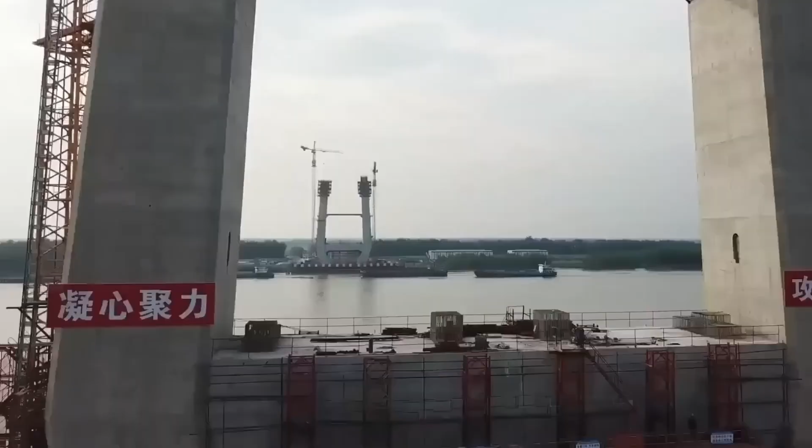China, hailed as the infrastructure maniac. Former US President Trump once openly declared that America would never be able to compete with China.

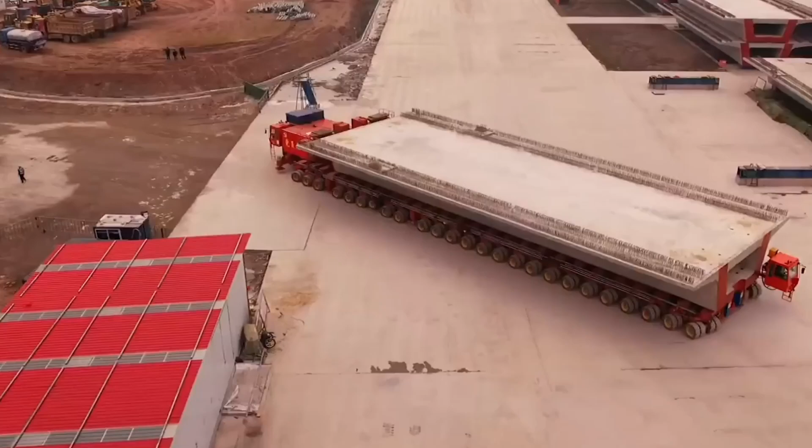I love China. People say, "Oh, you don't like China." No, I love them. But their leaders are much smarter than our leaders, and we can't sustain ourselves. China, you go there now, roads, bridges, schools, you've never seen anything like it. They have bridges that make the George Washington Bridge look like small potatoes, and they are all over the place.

Does reality truly align with the president's description? The truth emerges as we dive deeper. What you're witnessing is China's monumental cross-sea megastructure, the Shenzhen-Zhongshan Link, an engineering colossus spanning turbulent waters. It serves as a core transportation hub project in the Guangdong-HK-Macau Greater Bay Area.

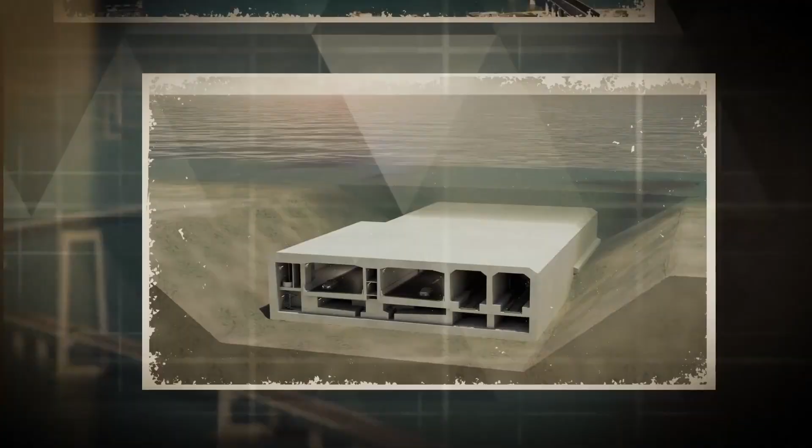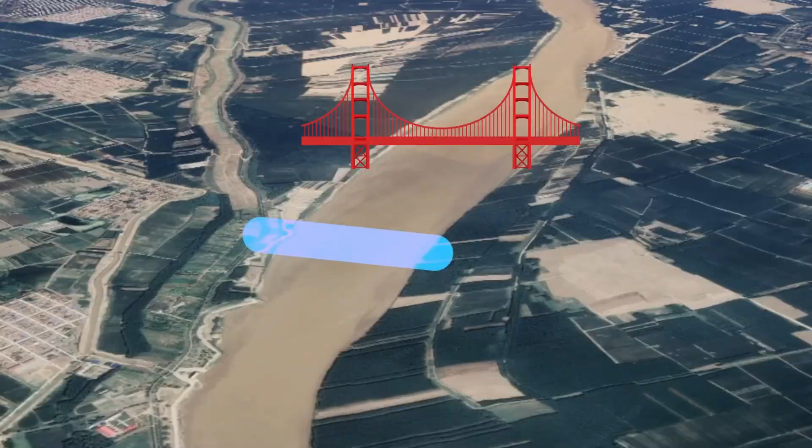Stretching 24 kilometers in total, this project is an integrated cross-sea engineering feat, combining bridges, islands, tunnels, and underwater interchanges, including an undersea tunnel that spans approximately 6.8 kilometers. In this tunnel, engineers embedded 23,000 fiber optic sensors within the immersed tubes, allowing the concrete to sense stress changes in real time, much like human nerves.

This technology is 40% more sensitive than its Western counterparts, prompting even the journal Nature to exclaim, "The Chinese have taught concrete how to think." Next, we will examine in detail how Chinese engineers built this undersea tunnel.

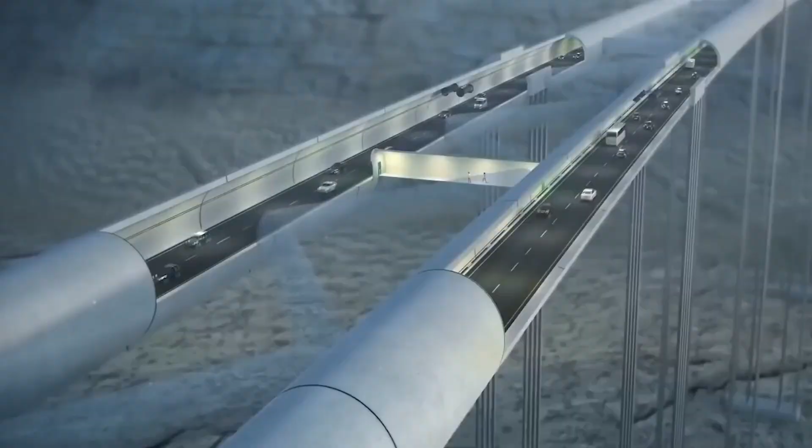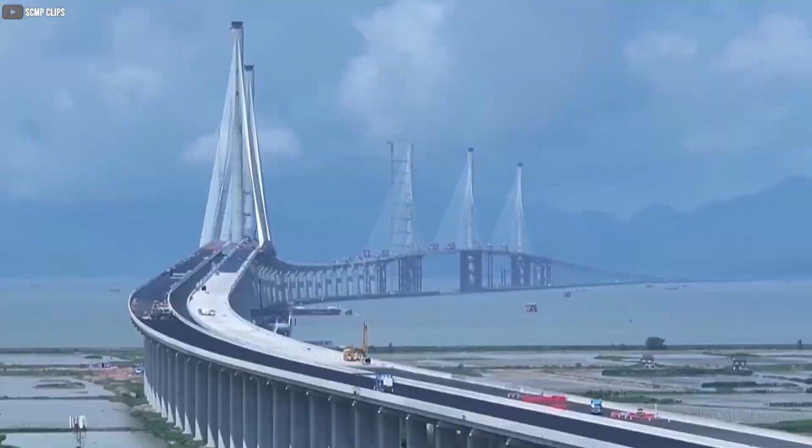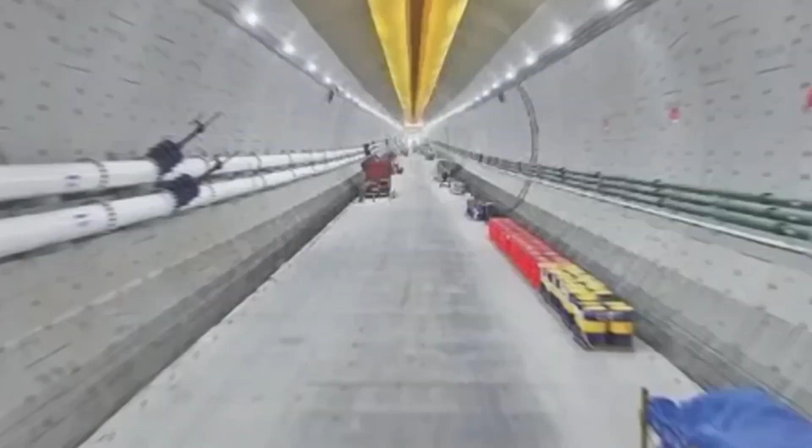This tunnel, 6.8 kilometers long, is designed with 8 lanes in both directions, 2 more lanes than the Hong Kong-Zhuhai-Macau tunnel. It is composed of 32 giant immersed tubes and a final joint, buried more than 40 meters beneath the sea. When Dutch immersed tube specialists declared an 8-lane bidirectional configuration impossible, Chinese engineers staged a subsea engineering marvel in the Pearl River estuary, deploying an innovative steel-concrete sandwich composite structure that defied Western engineering conventions.

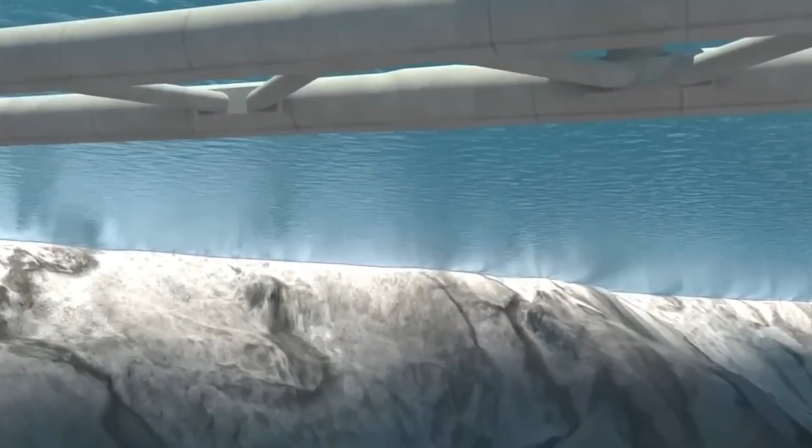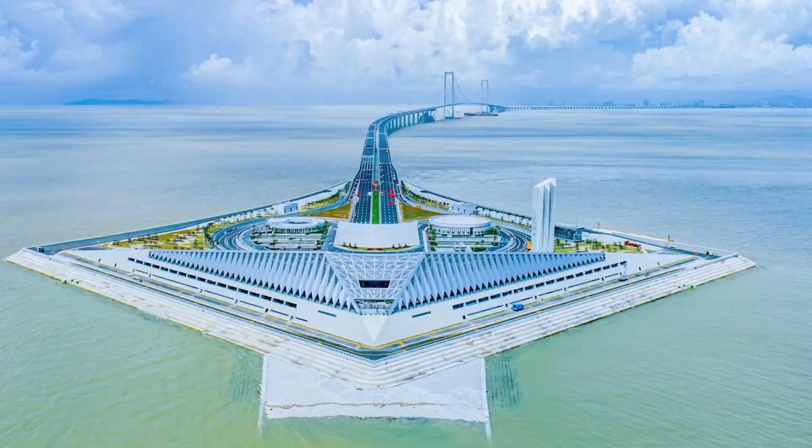Traditional immersed tube tunnels typically employ cast-in-place reinforced concrete, a process that is both labor-intensive and time-consuming. For the Shenzhen-Zhongshan Link's undersea tunnel, engineers adopted a steel shell design. However, the 8-lane configuration significantly widens the tube structure, with each additional lane increasing hydrostatic pressure by 27%, approximately 20,000 metric tons per lane. This equates to bearing the combined weight of 15,000 sedans.

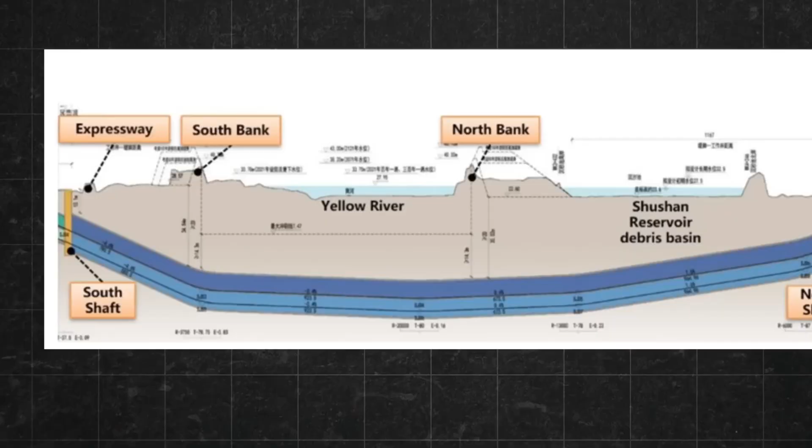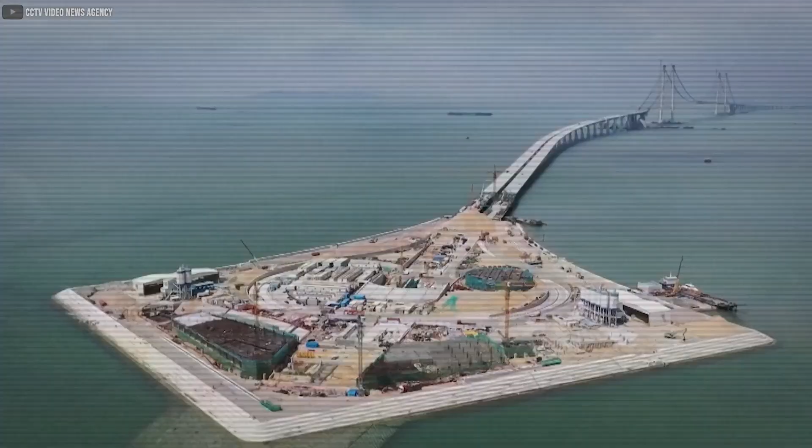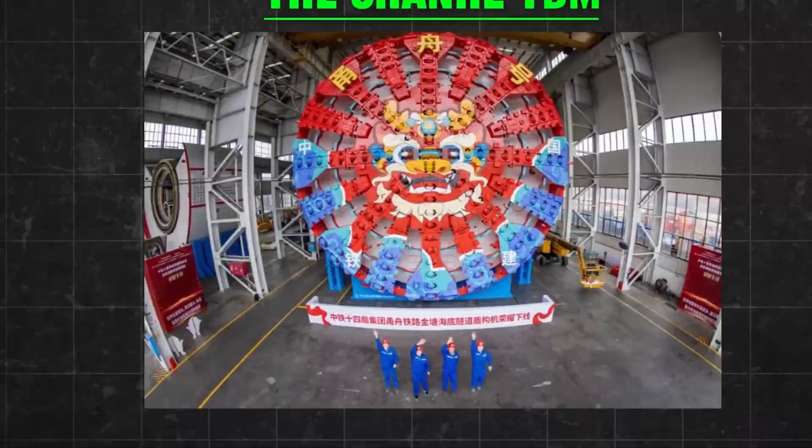Compounding this challenge, the overhead navigation channel accommodates 10,000-ton cargo vessels. The dual pressure from hydrostatic forces and shipping loads creates a structural conundrum akin to crushing forces on a beverage can, potentially causing tunnel deformation. After thorough research and verification, Chinese engineers decided to use a steel shell concrete structure.

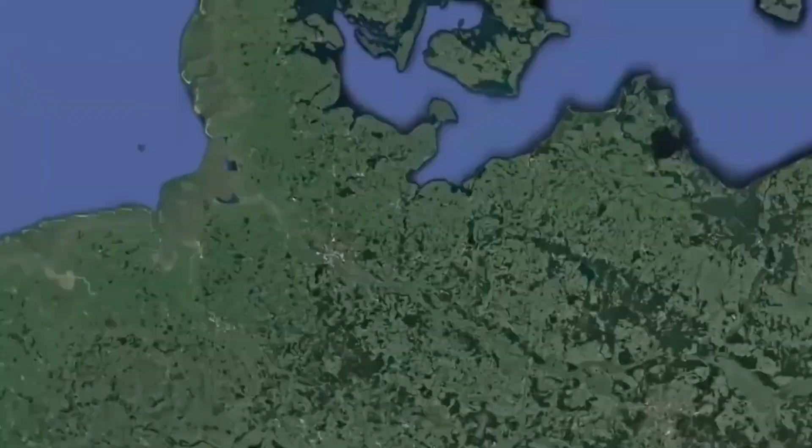In essence, the process begins with fabricating the tube steel shell, followed by concrete infilling, a composite construction method that significantly enhances compressive strength while eliminating traditional rebar tying. This innovative hybrid structure achieves a 400% increase in flexural rigidity, a breakthrough so transformative that the ASCE has incorporated it into their latest design specifications.

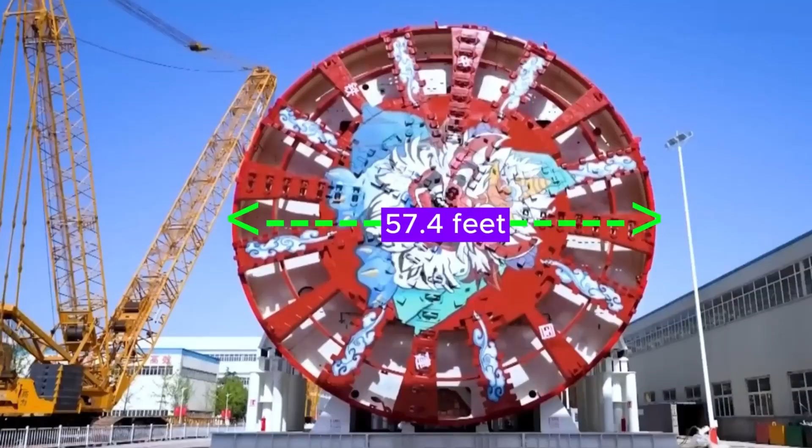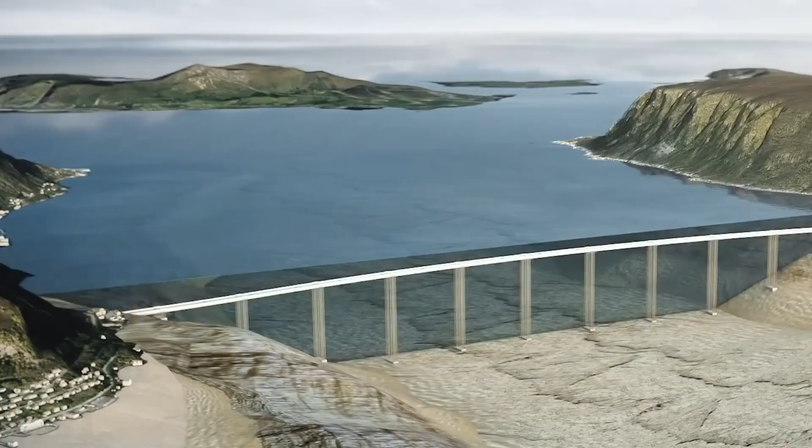The immersed tube is manufactured in an automated facility where steel plates are precision cut into various profiles, then robotically welded. Intelligent welding robotic arms achieve 0.02 mm seam alignment accuracy, the error being only a third of a human hair's thickness. Certification testing by Germany's TÜV Rheinland confirms that the weld quality exceeds DIN 6700 standards by 22%.

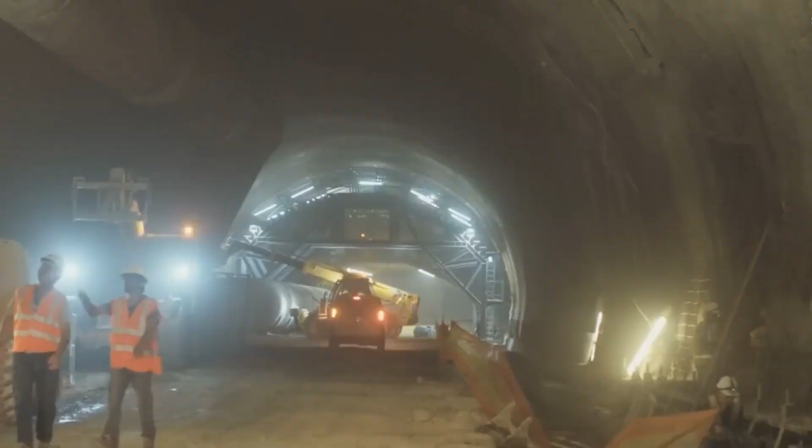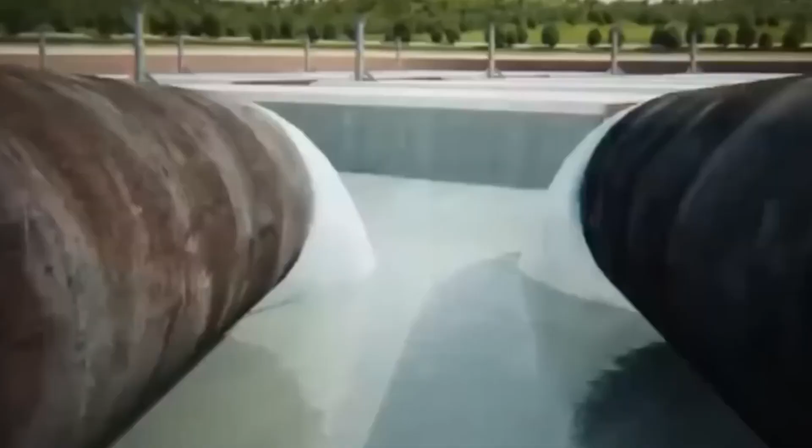Due to their enormous size, each tube is divided into 22 segments. After each segment is completed, a gantry crane assembles them, followed by final assembly work by the crew. Besides the robust and watertight exterior, ensuring that the tube remains corrosion-free for 100 years underwater is key.

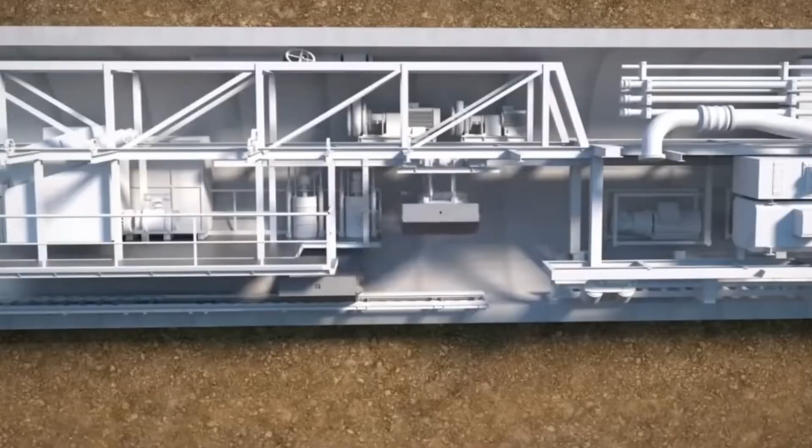After the steel shell is completed, its surface is sprayed with 5 layers of anti-corrosion coating with a molecular structure that mimics shark skin, leaving no foothold for algae or bacteria. Each tube is then equipped with 552 sacrificial anodes, ensuring that under their protection, the tube can be safely used for a century. Next, the tube is transported to another facility for the final concrete pouring.

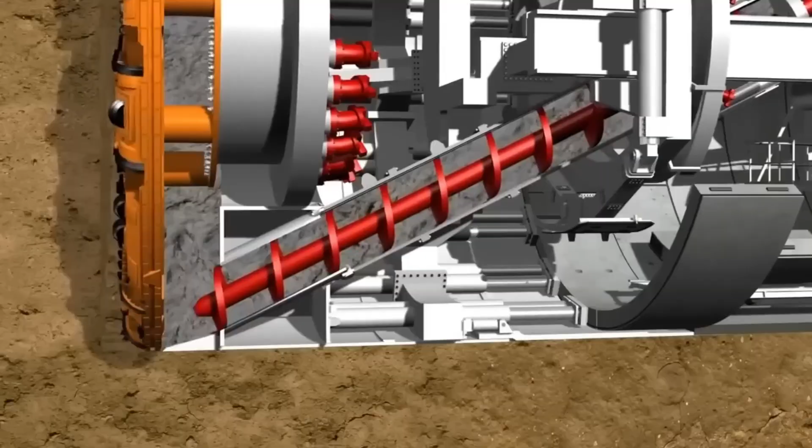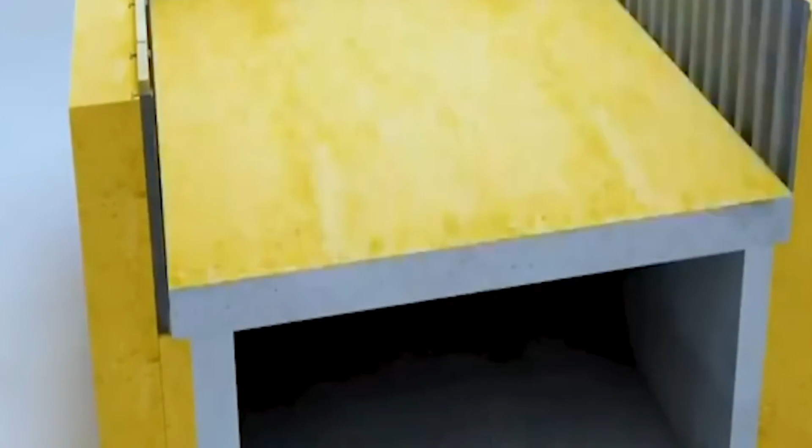The underwater immersed tubes of the Shenzhen-Zhongshan Bridge are designed with a steel shell concrete structure. Once the steel shell is completed, its inner chamber is filled with concrete. The total volume of concrete for 32 tubes exceeds 1 million cubic meters. At this point, manual labor could no longer keep pace, necessitating the use of intelligent concrete pouring robots.

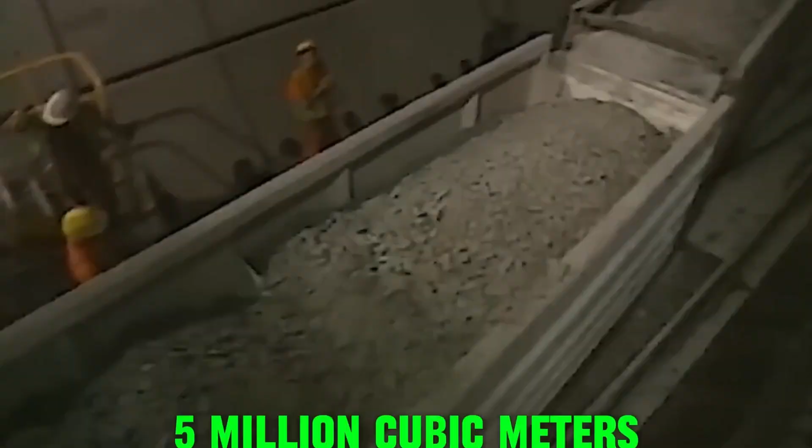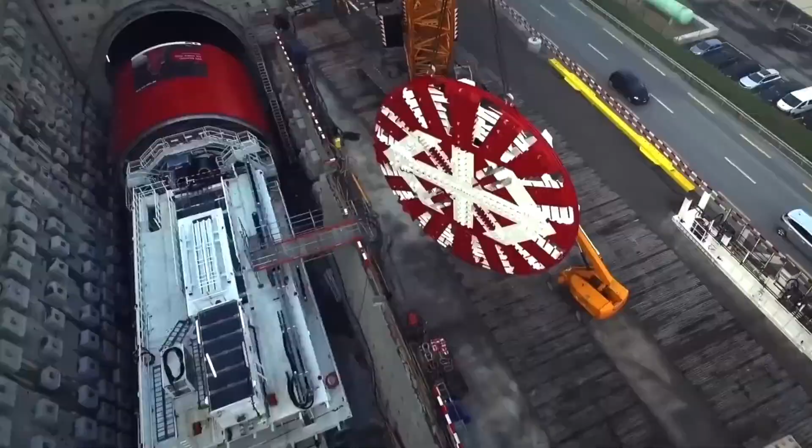These robots autonomously move along predetermined routes on the tube's top slab, automatically detect and drill holes, and perform the pouring operation entirely on their own. Using 1,200 sensors to continuously regulate the concrete's flow rate, these smart robots compressed a process that traditionally took 90 days into just 28 days.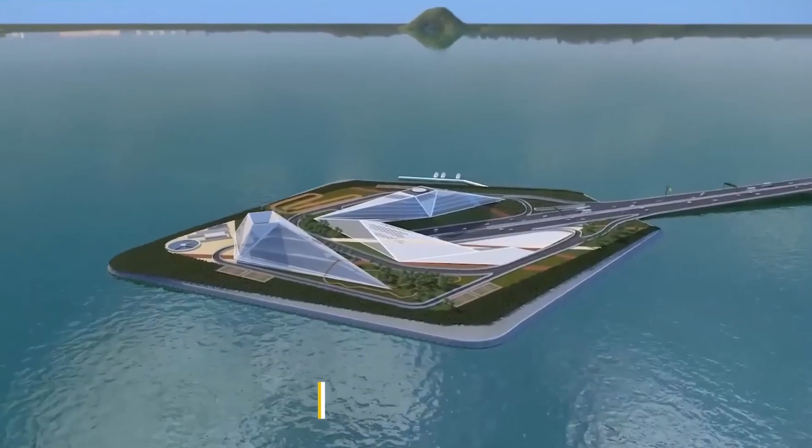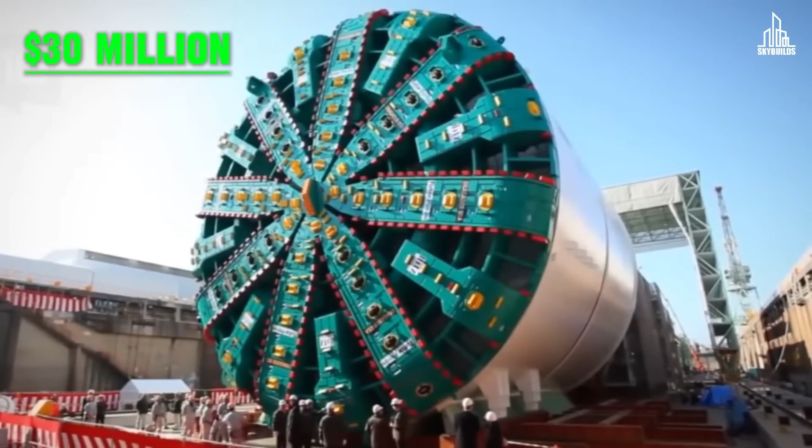Even more astonishing is the zero manual vibration technique. Self-compacting concrete flows like melted dark chocolate into every crevice with nanometer-level precision, comparable to the intricate distribution of capillaries in the human body. To formulate the optimal composition ratio, engineers dedicated 3 years to systematic experimentation,

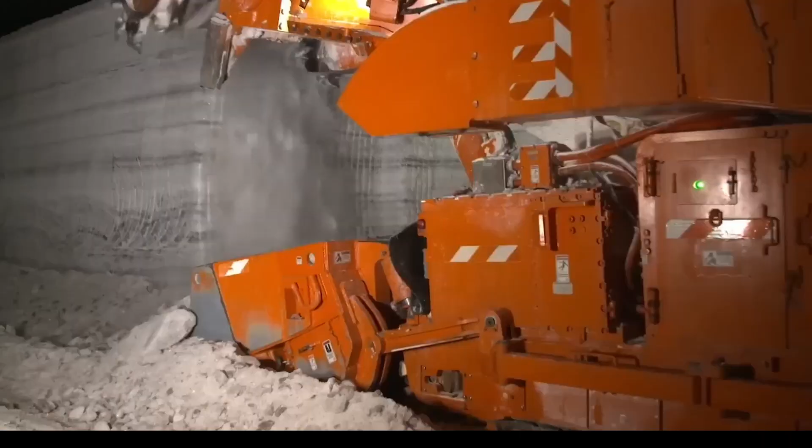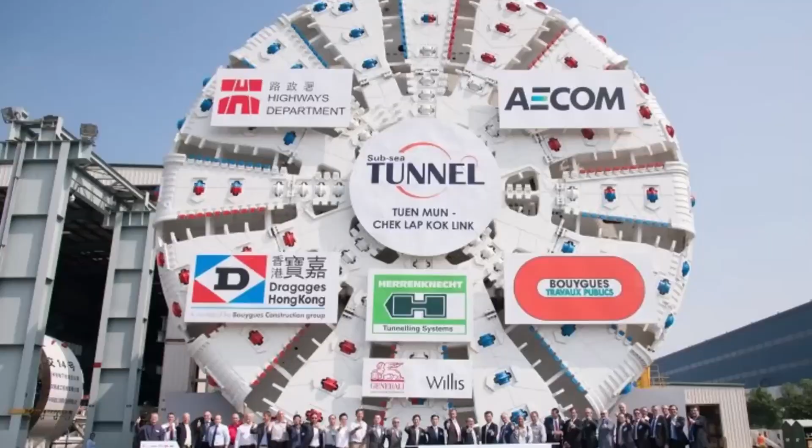even building a full-scale tube module to simulate the tube's ability to withstand more than 1,000 typhoons and resist a level 9 earthquake, as well as a scenario in which sea levels rise by 3 meters by 2075. This "die before rebirth" Eastern philosophy reduced the project risk by 83%. These simulation tests effectively validated the reliability of using this specialized concrete in the immersed tubes.

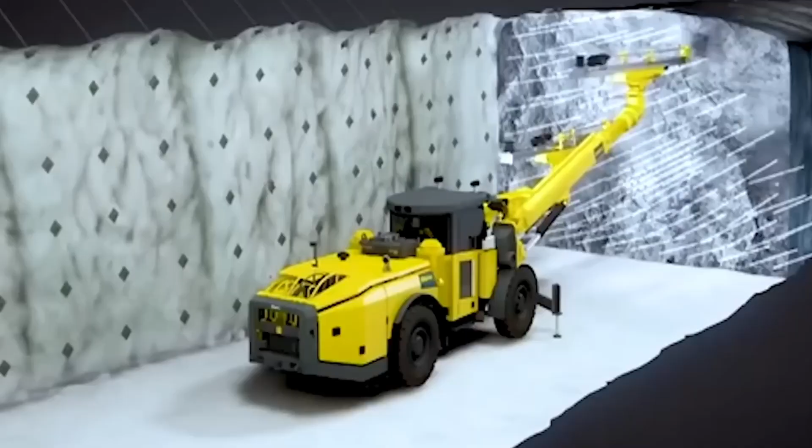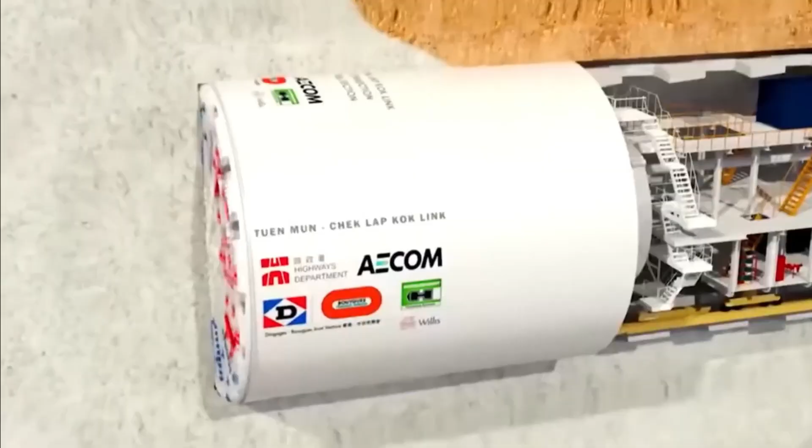Although this concrete's strength and flowability meet the requirements for casting the tubes, once it leaves the batching plant, it must be poured within 90 minutes. This critical requirement led to the creation of an intelligent manufacturing facility capable of casting 1 tube section per month, earning its reputation as the Smart Dream Factory for immersed tube prefabrication.

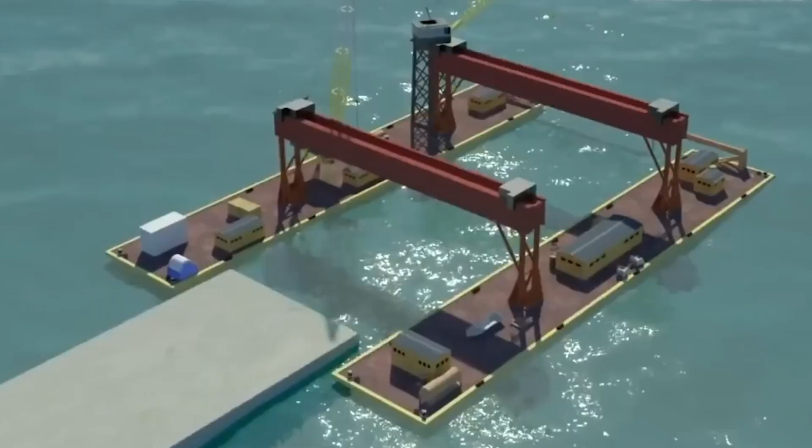A complete steel shell immersed tube weighs as much as 80,000 tons. Moving it a mere 200 meters to the departure area is no small feat given its massive weight. With 200 transport vehicles and over 1,000 steel wheels, the 80,000-ton tube was slowly moved and transferred in just 4 hours, a task that used to take 7 days for a tube of similar mass.

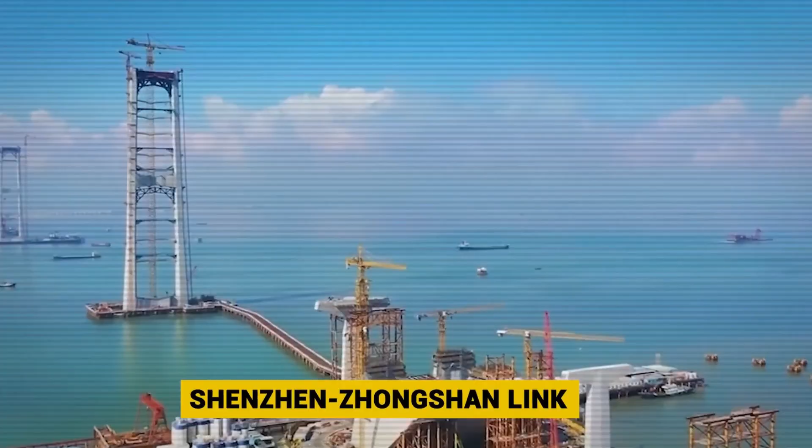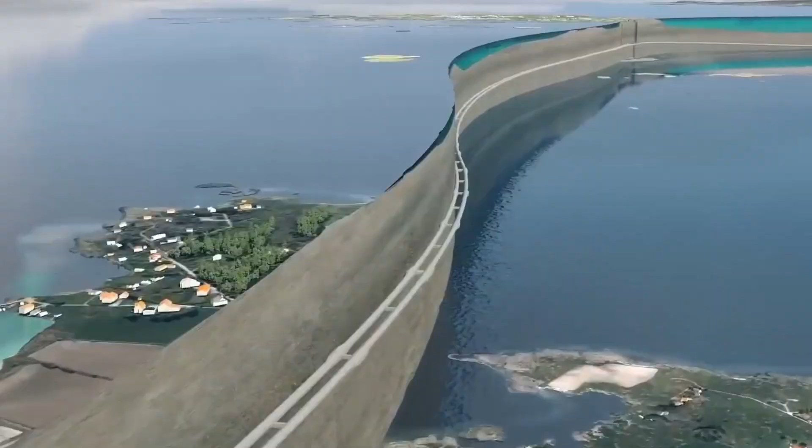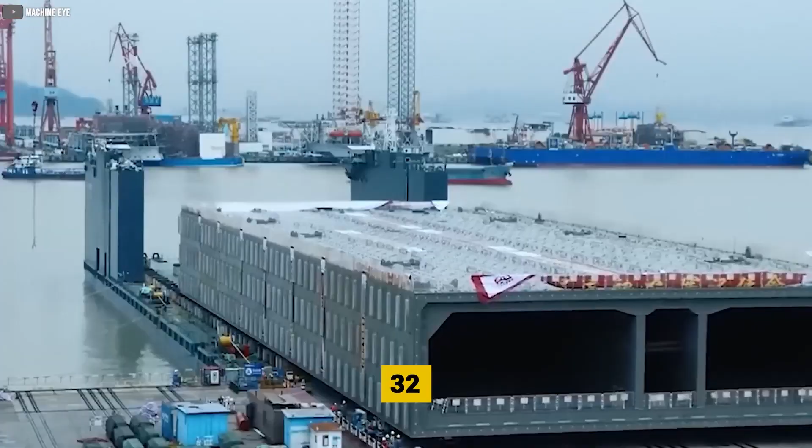Before a tube can be brought in or out, workers must conduct final inspections. Using millimeter-precision, non-destructive testing equipment, the density of the concrete can be assessed without damaging the steel shell. Once approved, the tube is fitted with a ballast water tank and steel sealing doors, then maneuvered by buoyancy into a deep-water dock. Next, it is ready for installation.

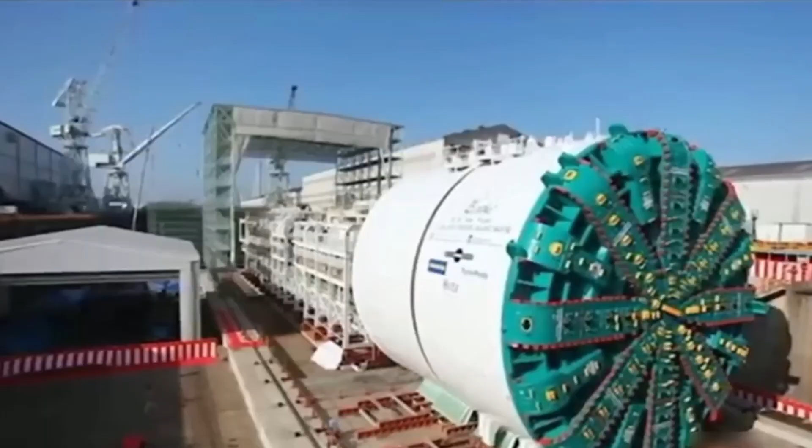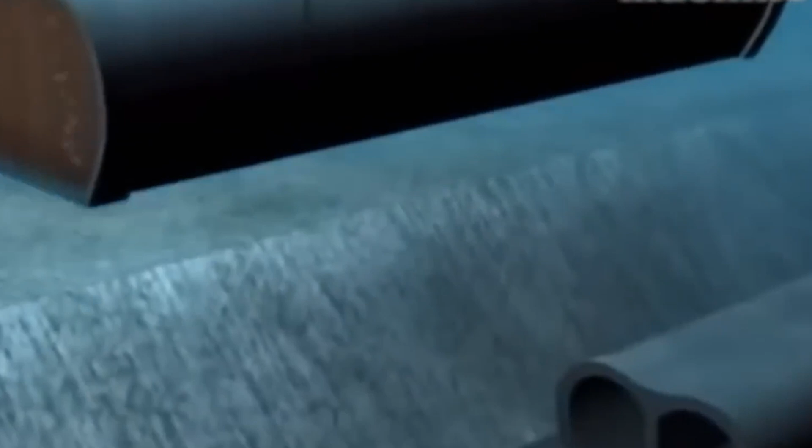Now that the Shenzhen-Zhongshan Link is fully operational, a brand new landmark mega-project spans the Pearl River estuary. When the first car's headlights pierced the darkness of the undersea tunnel, it was not just the rebirth of a transportation artery but an epic dialogue between humanity and the ocean. Chief Engineer Song Shenyou told reporters, "We spent 16 years turning a wild idea on paper into a routine reality that millions cross every day.

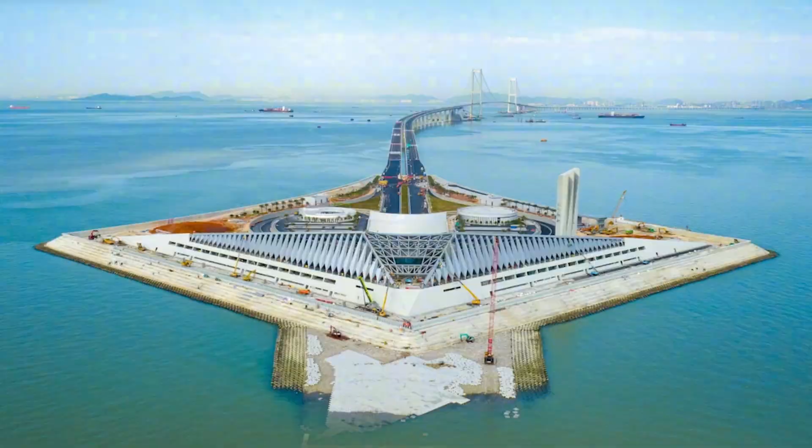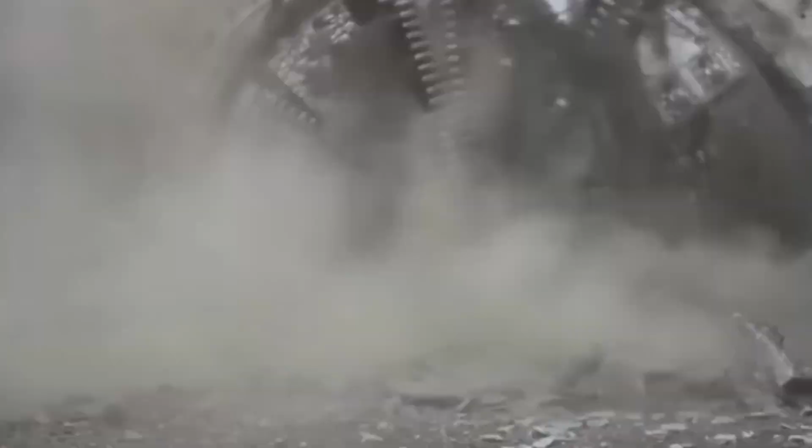Our project is located right at the geometric center of the Guangdong-Hong Kong-Macau Greater Bay Area. The construction conditions around it are exceptionally complex. Flood prevention and tidal response are also quite sensitive. We conducted 52 related topic validations; among them, navigation carried out 19 parallel certification tasks."

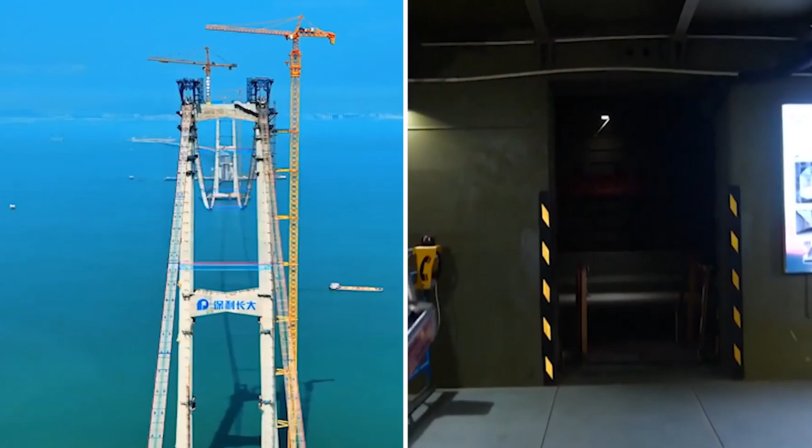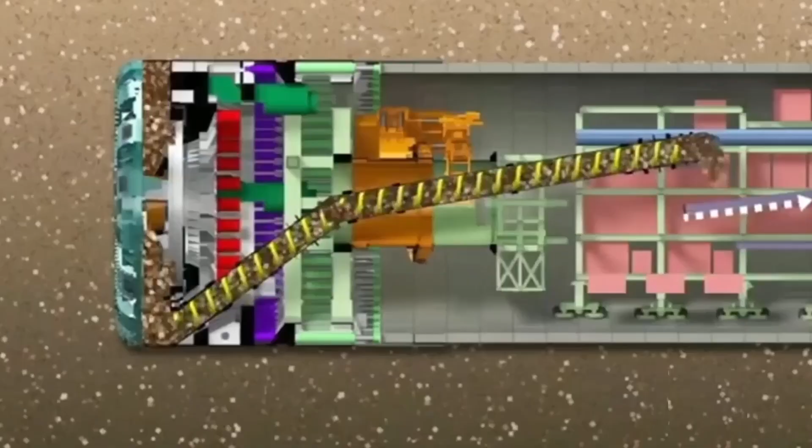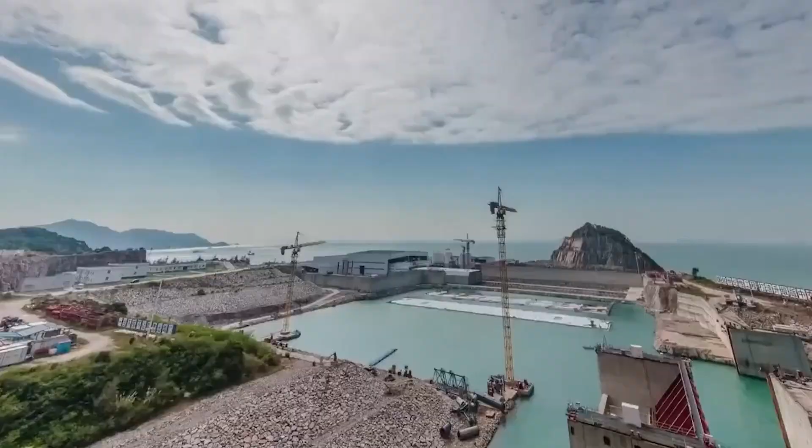If the Hong Kong-Zhuhai-Macau Bridge is a maritime link binding Guangdong, Hong Kong, and Macau together, then the Shenzhen-Zhongshan Link is the key to opening up the golden inner bay of the Pearl River estuary, further boosting economic development in the Greater Bay Area. With its global leading scale, complexity, and speed, Chinese infrastructure has become a shining national card that captures the world's attention. The infrastructure maniac will never stop.